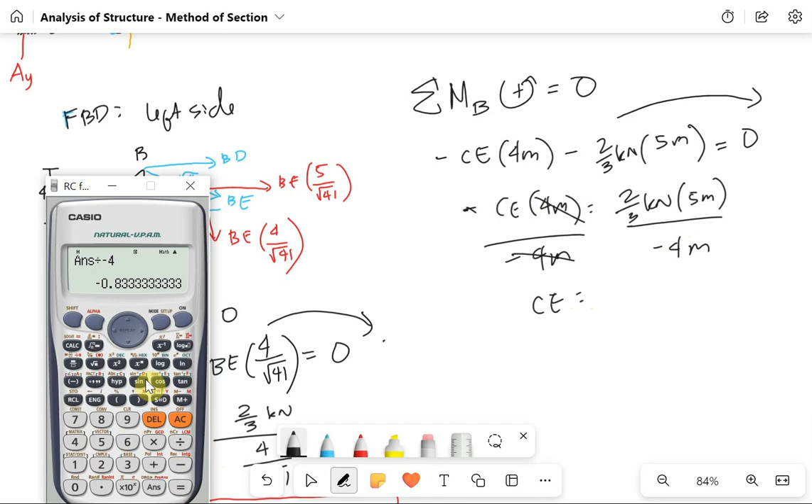Divided by negative 4. So ang sagot, negative 0.8333 kilonewton. So dahil answer na yan, no? Negative 0.8333 kilonewton. So nag-negative siya, meaning mali yung assumption natin na compression siya sa point C.

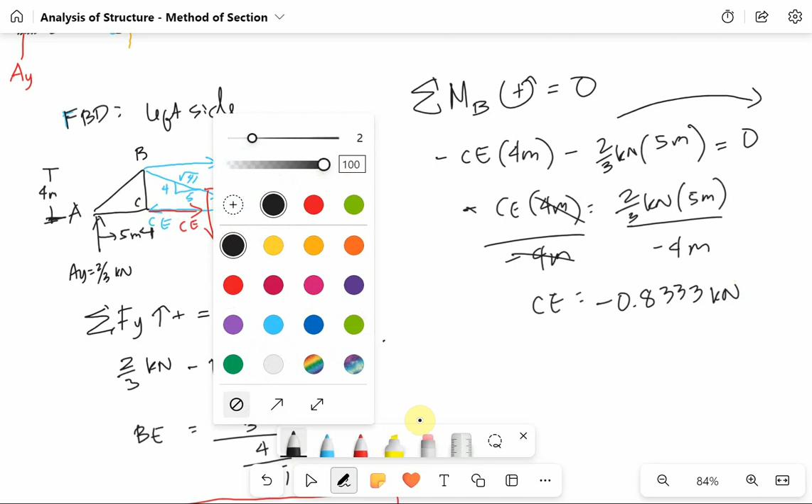So dapat pala ang CE ay in tension. So compression yung ginawa natin, papasok sa C. So ito ngayon, dahil nag-negative, dapat ay pakanan yung CE, no? Dapat naka-tension. So ang gagawin natin dito ay gagawin natin positive 0.8333 kilonewton, and ang actual direction niya o reaction ay naka-tension siya sa point C. Inihila niya si point C, so that is in tension.

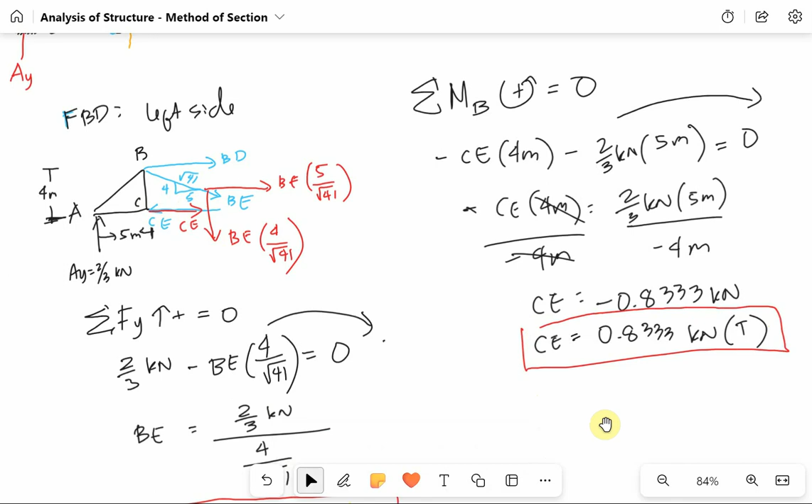Okay, so may sagot na tayo ng CE. Ang wala na lang tayo ay BD. Okay, so kung si BD, dahil si CE ay pakanan na, ito na yung gagamitin natin direction ni CE, no? Pakanan na kasi yan yung actual.

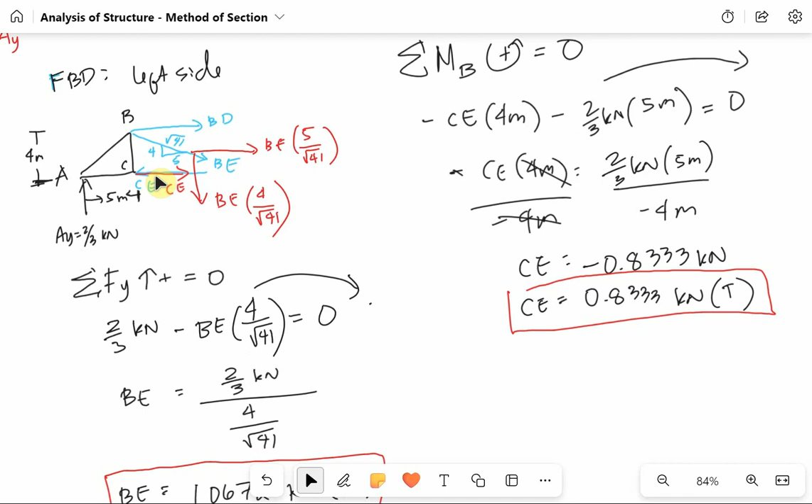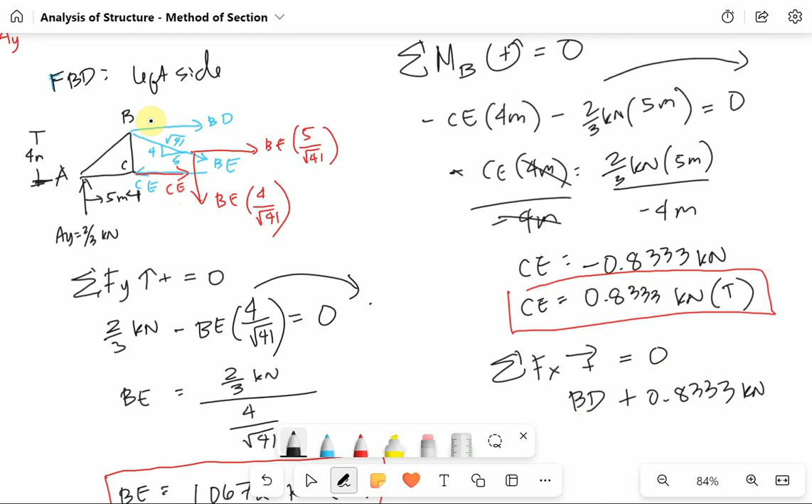So pwede na tayo mag-summation dito ng forces along X. Pakanan is positive, o going to the right is positive. So going to the right dito, assumption natin sa BD is pakanan. So positive BD, yung actual CE, dahil nasolve na natin si CE, so actual na yung gagamitin natin, pakanan din. So plus CE, or 0.8333 kilonewton. And then pakanan din si BE, no?

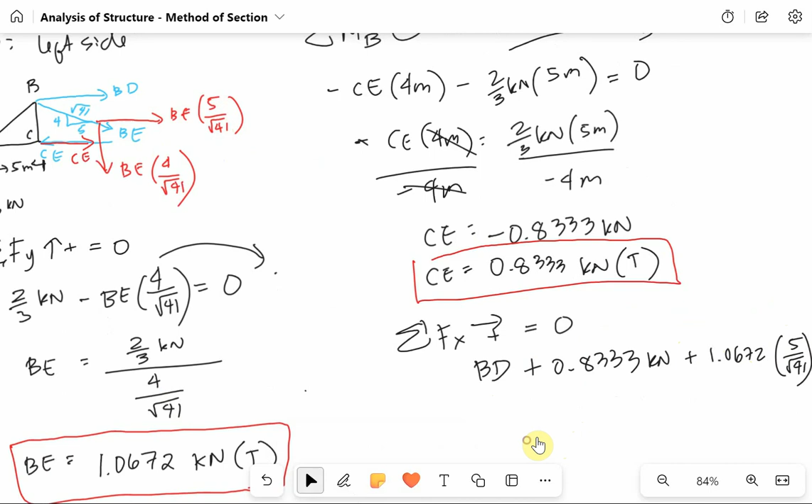BE, which is equal to, ang BE natin, plus, ito na, no? BE, ang BE natin ito, 1.0672, yung pakanan is 5 over square root of 41 times 5 over square root of 41 equals 0, no? Yun lang naman, CE, BD, BE. So equals to 0.

And then lipat natin yung iba. Itira natin si BD. So negative 0.8333 minus 1.0672 times 5 over square root of 41. So normally magne-negative yung sagot natin, ano? So yan na, no? Negative 0.8333 minus 1.0672 times 5 over square root of 41.

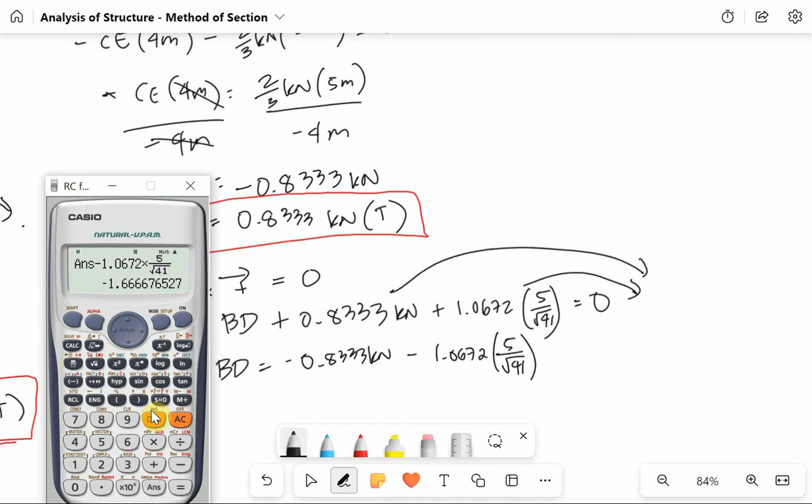So negative 1.6667, no? Yan yung BD. So BD is negative 1.6667 kilonewton. So meaning, dahil nag-negative yan, mali yung assumption natin na pakanan yung BD.

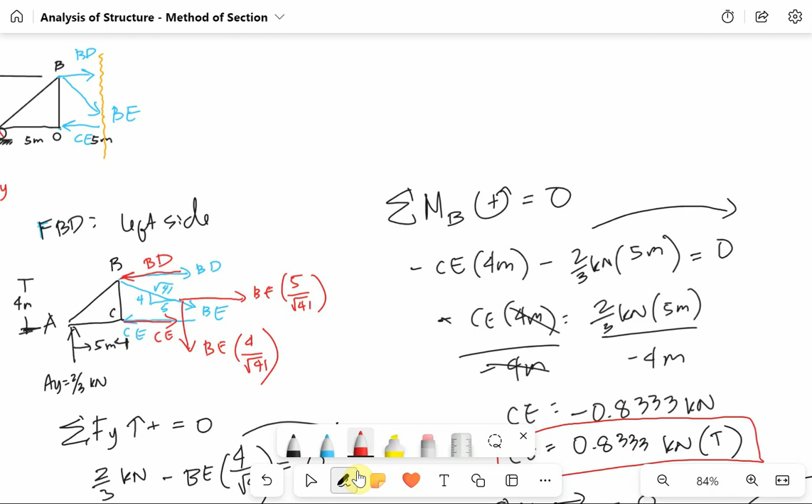Therefore dapat ang BD ay, o mali yung assumption natin na tension siya sa point B, ang BD pala ay compression, no? BD, pa-compress, papunta. Sinisiksik niya si point B, no? Compression. Okay, kaya yung lalagay natin sa BD, dahil nag-negative yan dyan, BD is equal to 1.6667 kilonewton compression.

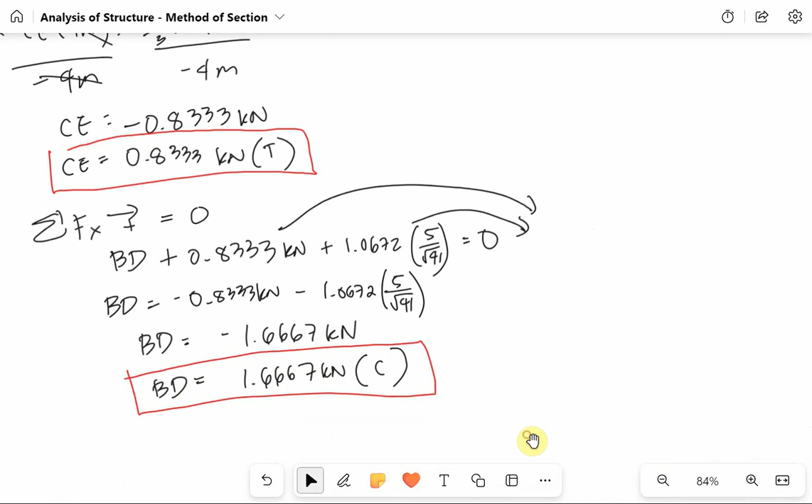Ayan, so wala naman na. Yan lang ay nahanap, no? Si BD, CE, at si BE. Tingnan natin, ayan lang, no? BD, BE, and CE.

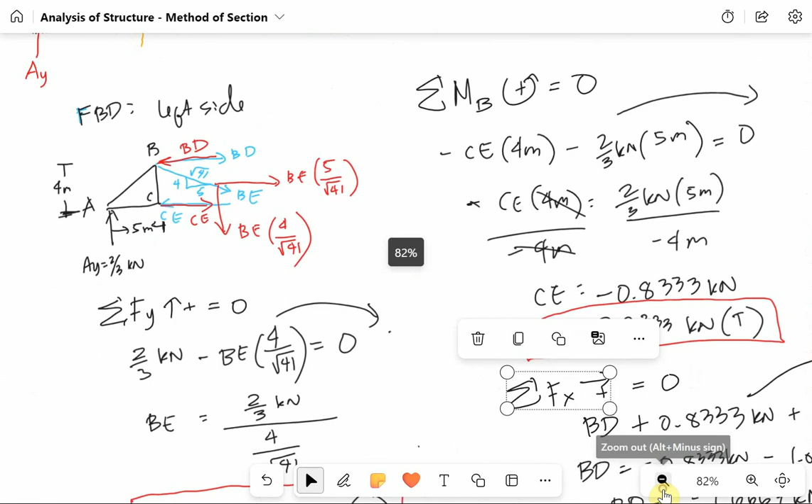Okay, so yun. So mas madali siyang gamitin si section kapag may certain member lang na hinahanap. Pero kapag lahat ng member pinapahanap, so either method of joints or method of section, nasa inyo na yon, unless sinabi ko anong process ang gagamitin nyo. Okay, so practice lang ng mga problems and good luck, no?